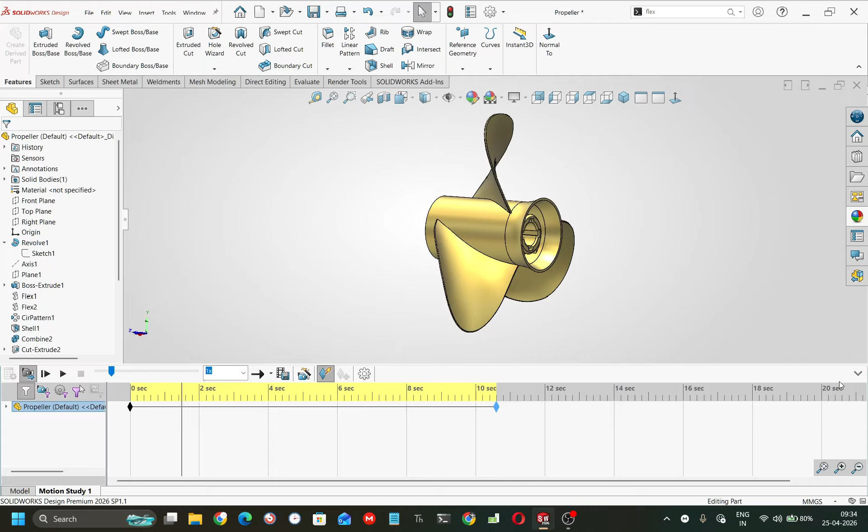In today's tutorial, we are going to create this clean and realistic propeller using SolidWorks step by step.

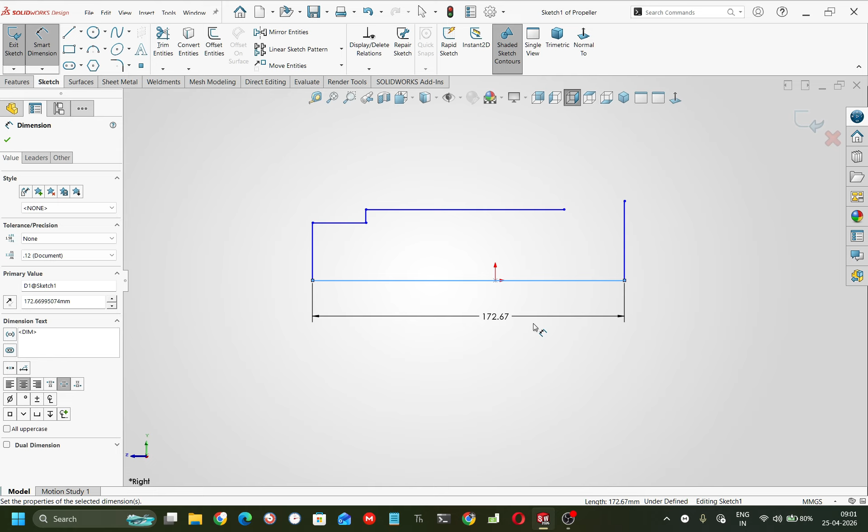Our first step will be creating a hub. Select right plane and sketch. As you can see on my screen, this will be our base hub creation. The horizontal length will be 150 mm, vertical length is 38, and this line vertical will be 2 mm, and this horizontal length will be 8 mm, and again horizontal line will be 115 mm, and this vertical line.

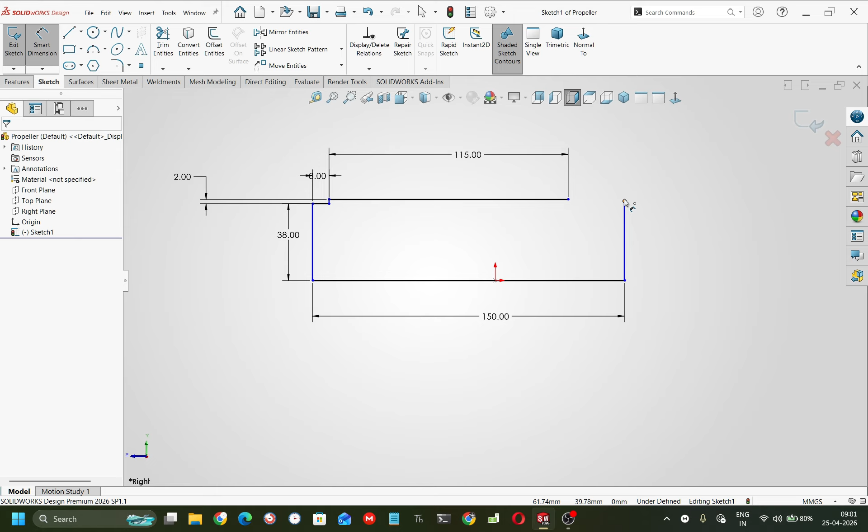Extend this vertical line, create an arc by using 3-point arc. The radius will be 60 mm, and this point and this point make it midpoint. Make it tangent also. So our sketch is fully defined.

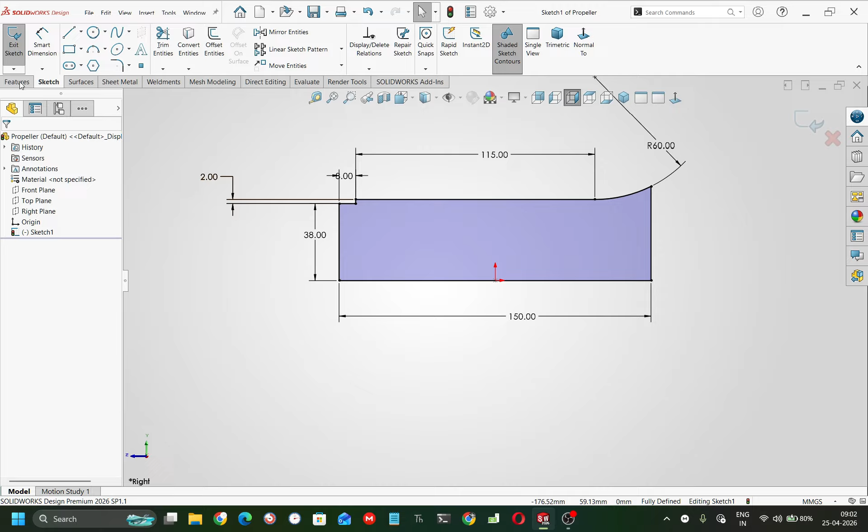Now I am going to use Revolve. Select this line and hit the green check. Our base hub has been created.

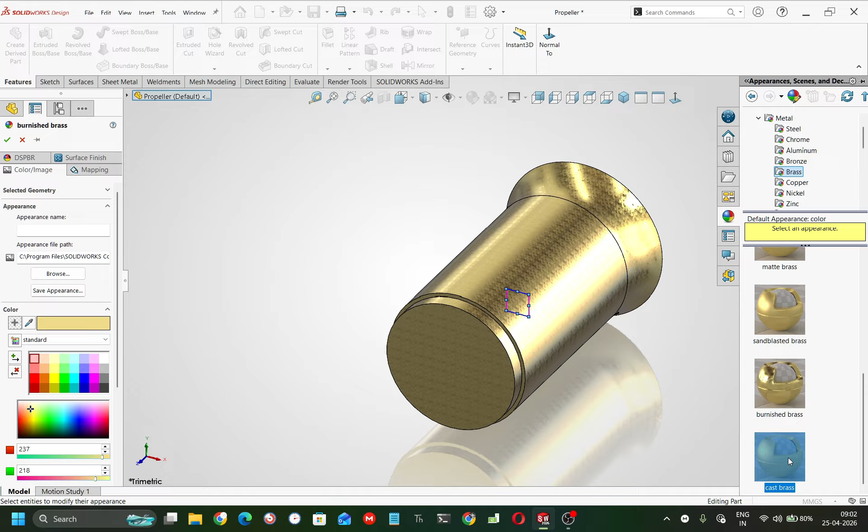Now I am going to change the appearances, selecting brass, and I am going to use burnished brass so it looks better.

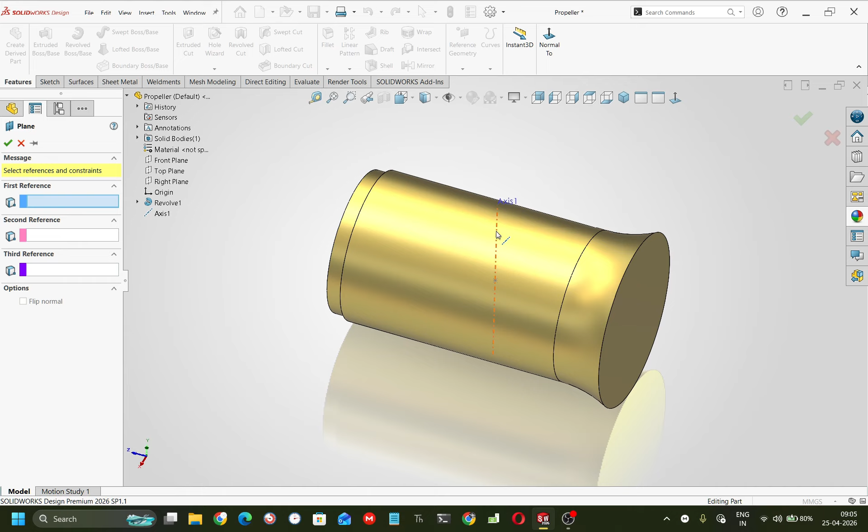Then I am going to create a plane. Select this axis and right plane. I am going to make a plane at an angle of 30 degrees. As you can see on my screen, I have created an angle.

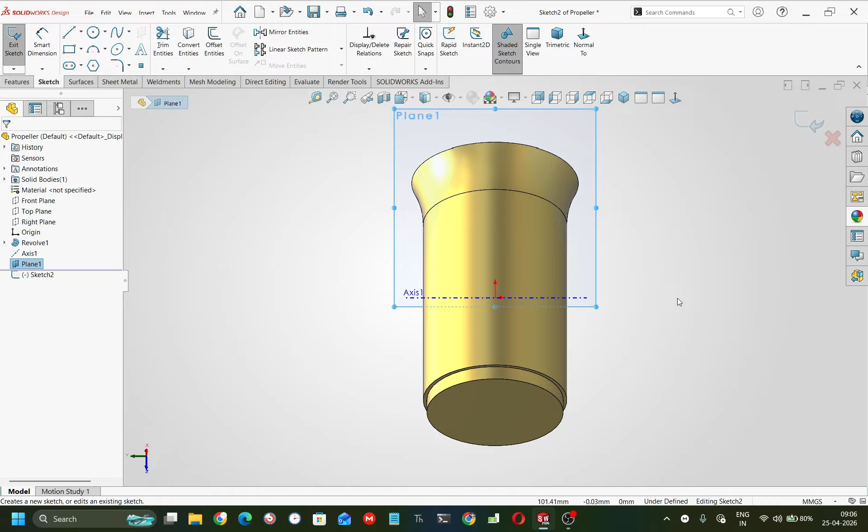Then select plane number 1 and sketch. I am going to select hidden line visible. Select a line, create a vertical line, and the distance from this point to that point is 65 mm. This origin point to the upper point will be 60 mm, and the distance between this vertical line and this origin will be 14 mm.

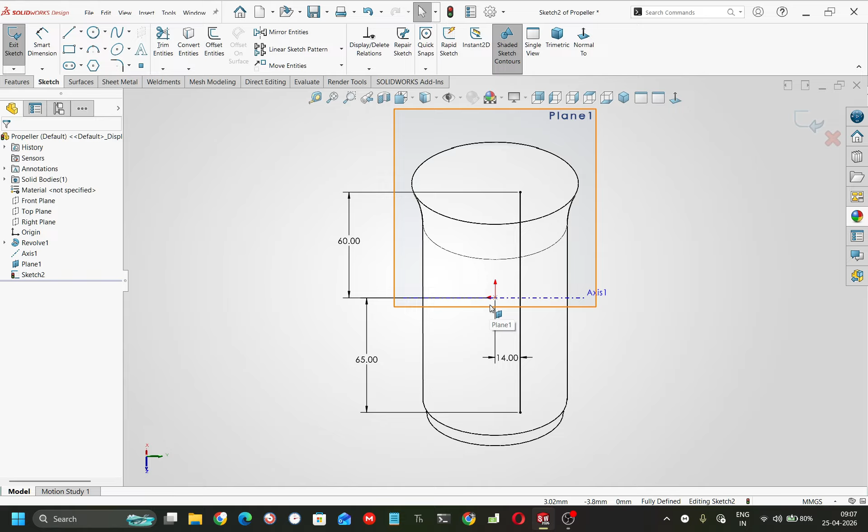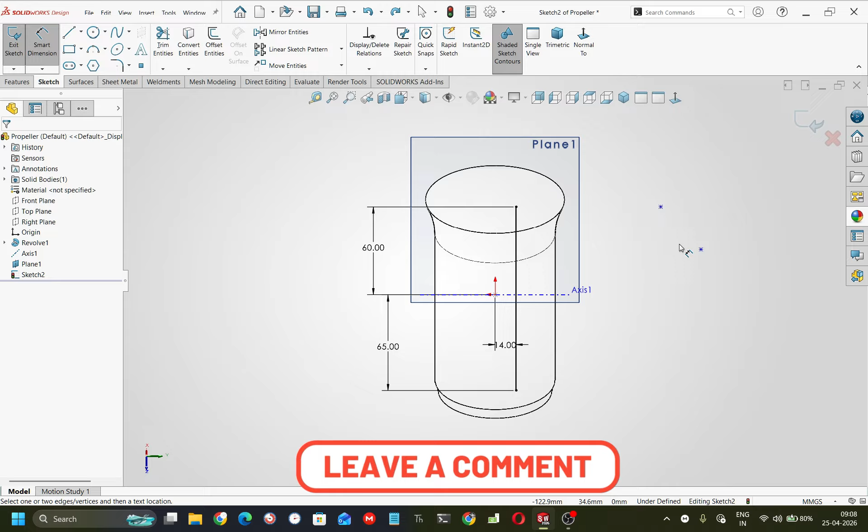Now I am going to create 2 points. Select this point, 1 point should be there and 1 point must be here. In this step I am going to define these 2 points. The horizontal distance will be 130 mm and the vertical distance will be 65, and this point to this point, origin point, vertical distance 34 and horizontal will be 150 mm.

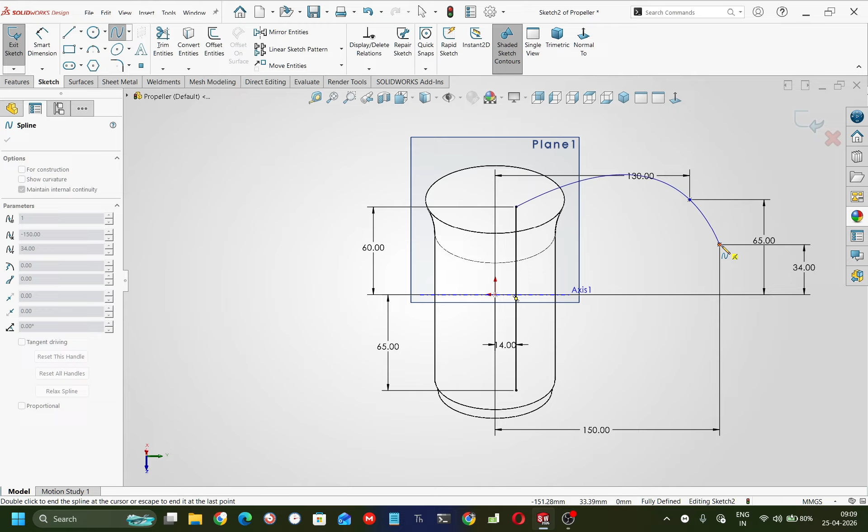So this is our path we have created. Now I am going to use spline. Select this point and this point and this point. This is a very important step, you need to see very carefully.

Now adjust this handle like this. Select this handle and make it vertical.

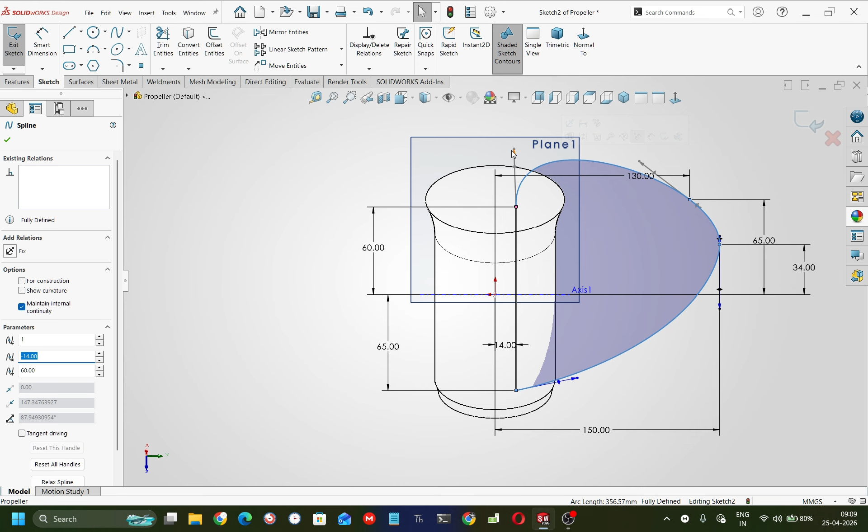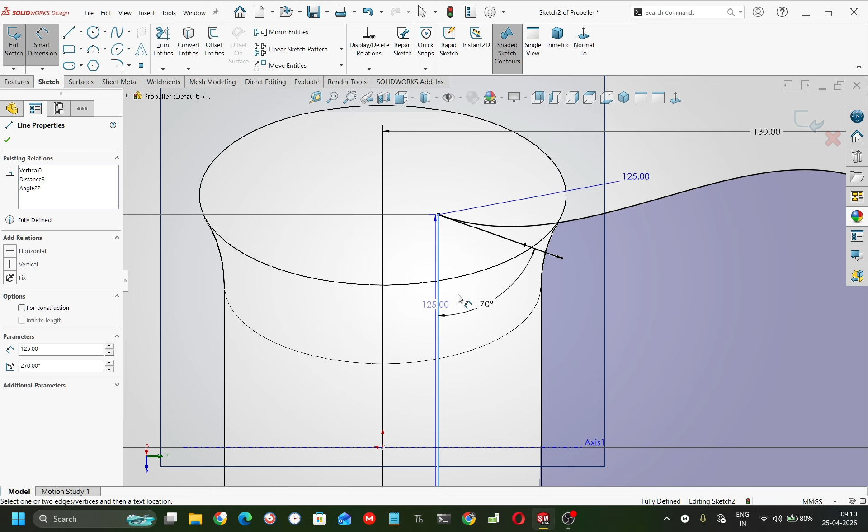To define the sketch fully, I am going to use smart dimensions. Select this handle, the first handle, the length, select this and this, the angle will be 70 degrees. As you can see on my screen, the handle length will be 125 mm. Our first handle has been fully defined.

Now I am going to select this handle, the second handle. Select this handle and this vertical line, and the angle is 75 degrees, and the handle length is 150 mm.

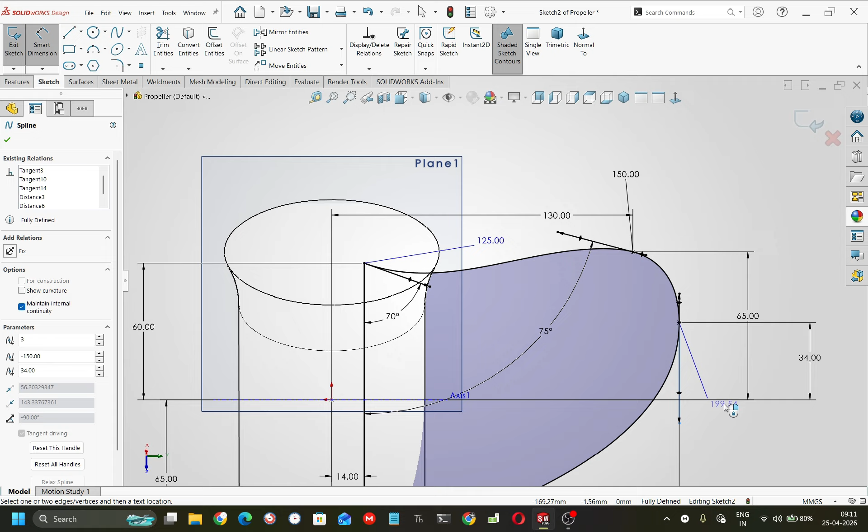The bottom handle length will be 210 mm, and this handle angle will be 79 degrees, and the handle length will be 240 mm.

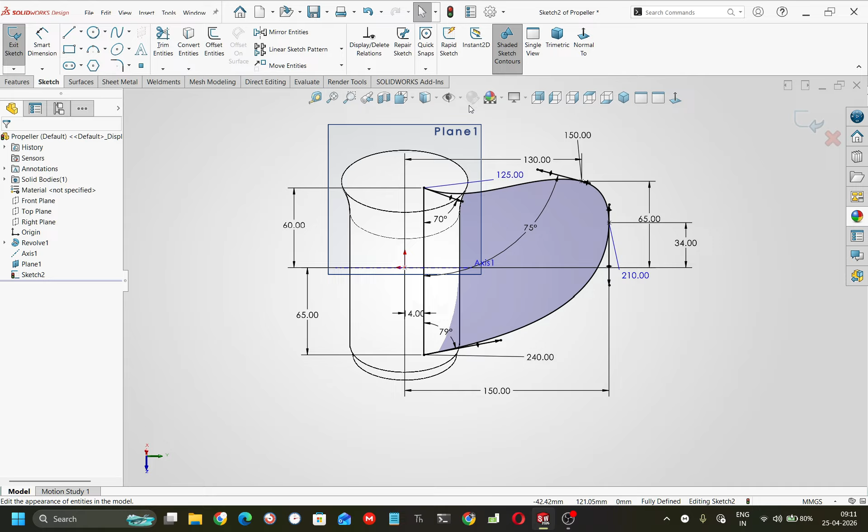Now pause the video. If you have any mistakes, you can correct them.

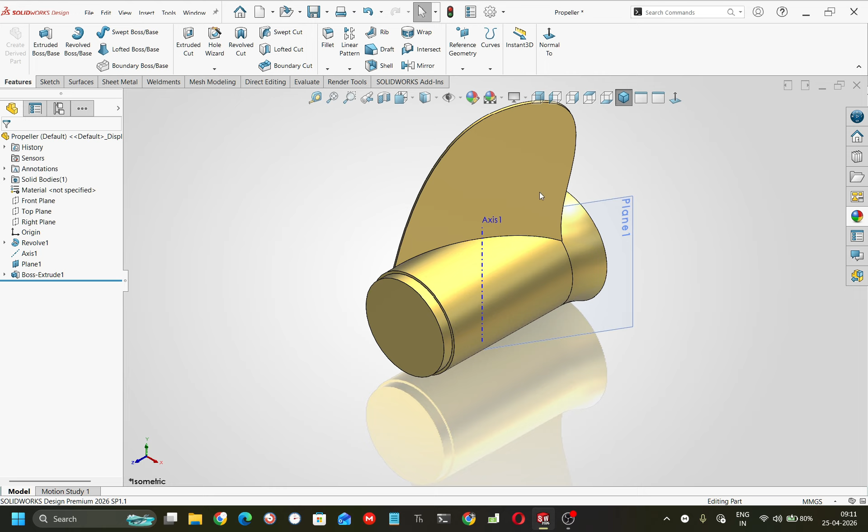Now remove the hidden line visible. Use boss extrude and select mid plane, and unmerge the result. Hide the plane and sketch. Select isometric view. Perfect.

We have almost 20% of the part completed.

This is the most important step to create this propeller's curve shape. I am going to use the flex feature.

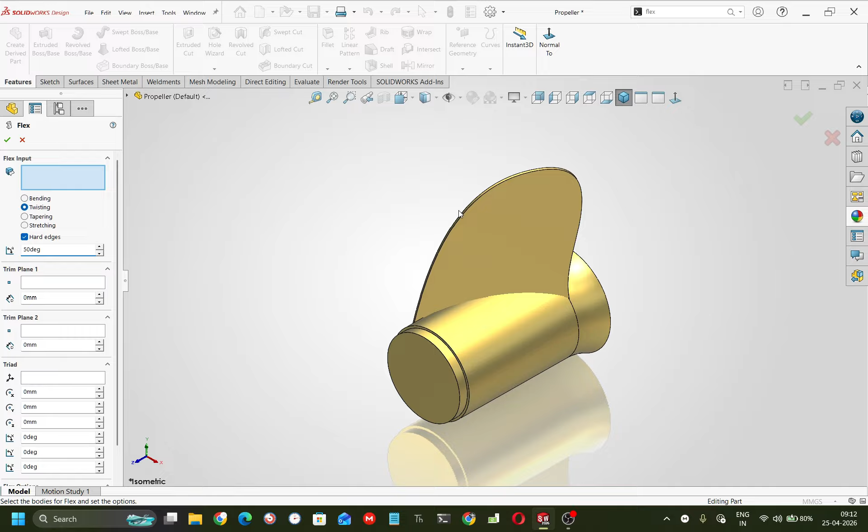Select first twist. The twist angle will be 50 degrees, and for flex input I am going to select this body. So this body must be in the X direction.

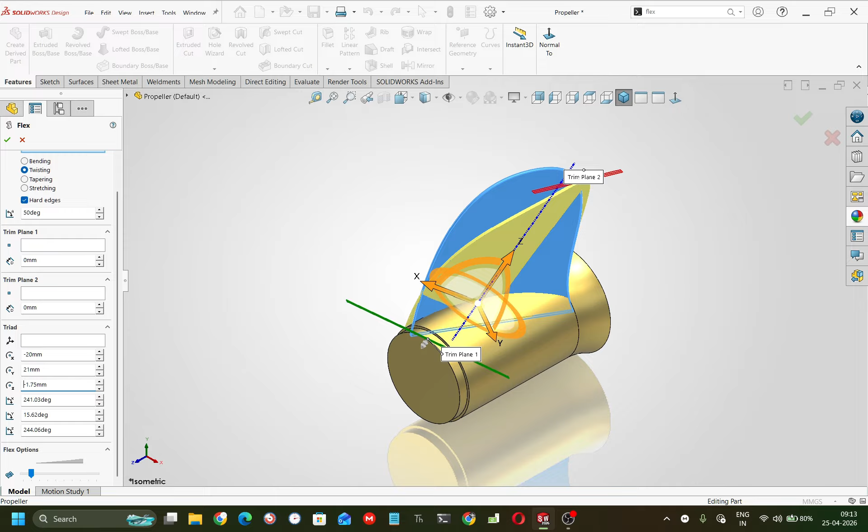As you can see on my screen, the X direction will be negative 20 mm. Y direction I want to twist 21 mm, and Z direction negative 1.75. The X direction angle will be 347 degrees, Y direction angle will be negative 25 degrees, and the Z direction I am going to select 0 degrees.

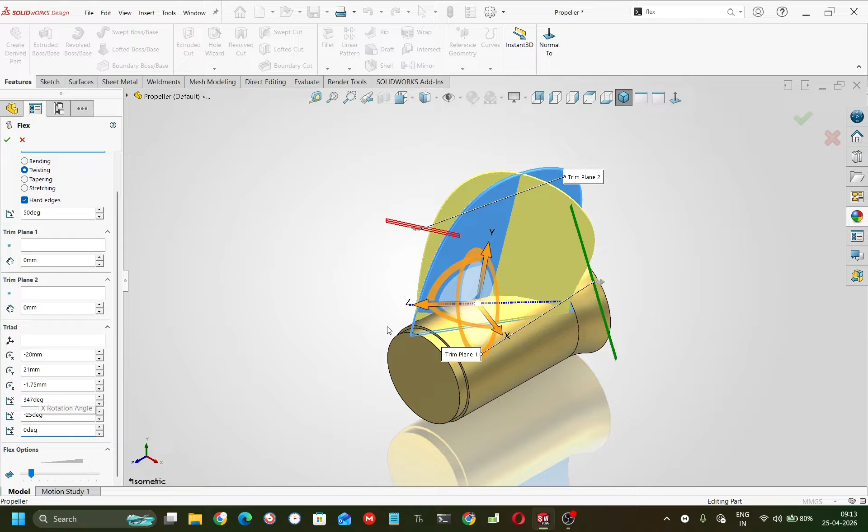So this is our part. As you can see how I twisted it, before and after. The yellow one is before and the blue one is after.

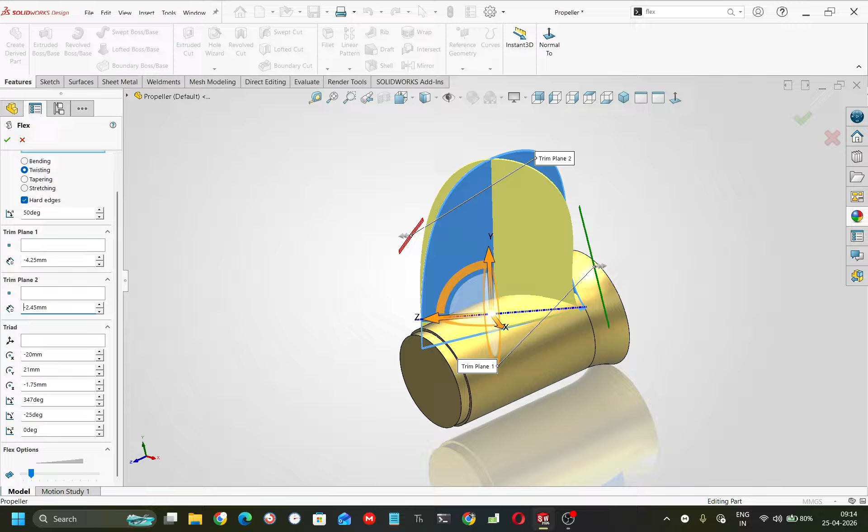The trim plane will be negative 4.25, and plane 2 must be negative 2.45. So these two planes must be in an offset position, so our geometry looks better with a curved shape.

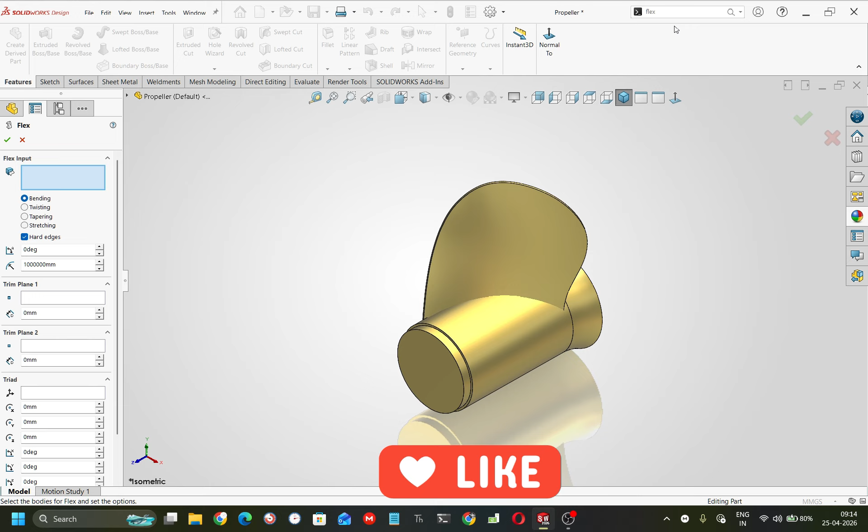Again I am going to select flex, now selecting bending. Select this part. The bending angle will be 45 degrees. It will bend.

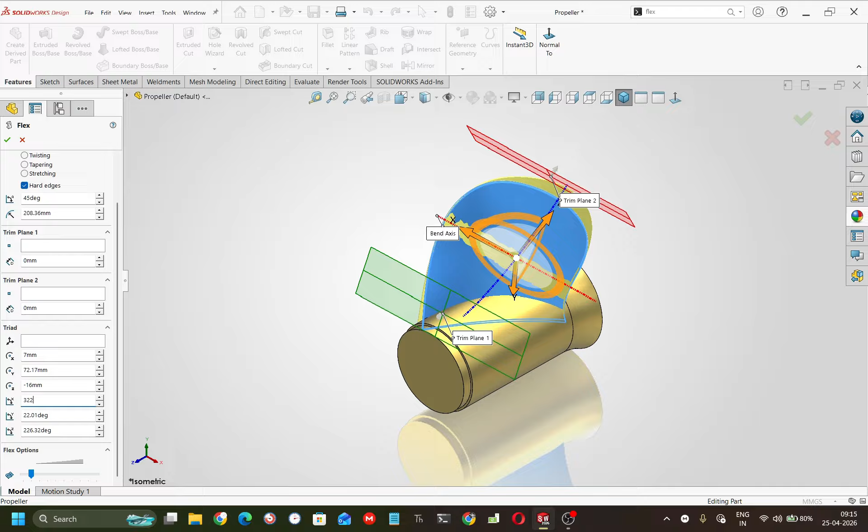In the x direction, I'm going to bend 7 mm. Y direction 72.17 mm, and the z direction will be negative 16 mm. The angle x direction will be 322 degrees, y direction angle will be 22.01 degrees, and the z direction angle will be 226.32 degrees.

Okay, and hit the green check.

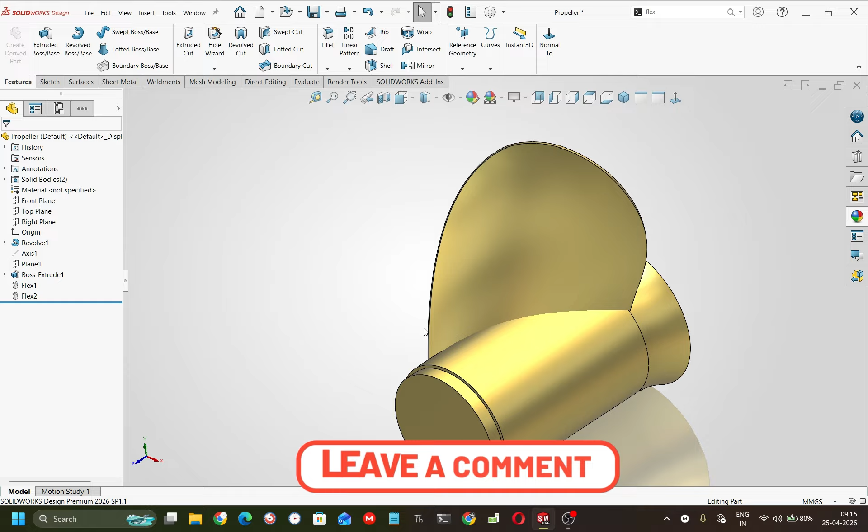The next step, I am going to use shell. This is our hub, it must be in a shell position. So the shell parameter, I am going to select 2.5 mm and hit the green check.

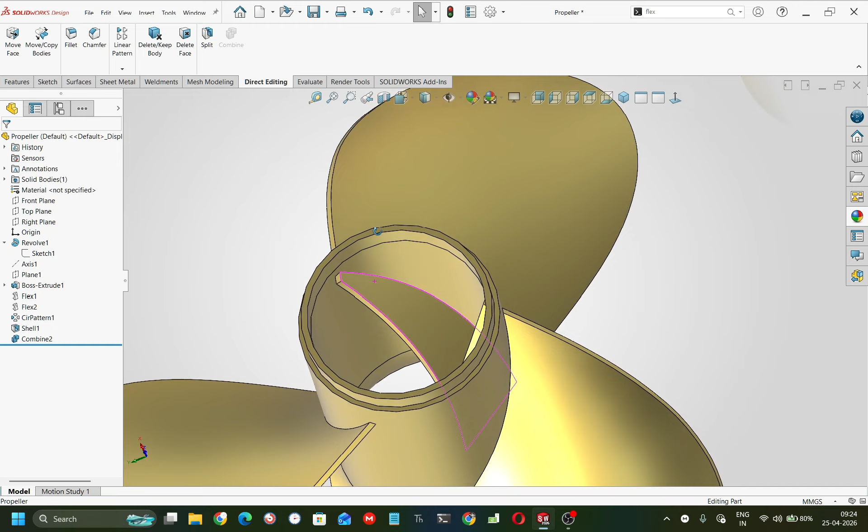I have skipped combine features, so you can combine this. Select this face and create a sketch. Select this center circle and convert it.

Choose extrude cut and through all. Make sure you combine this body.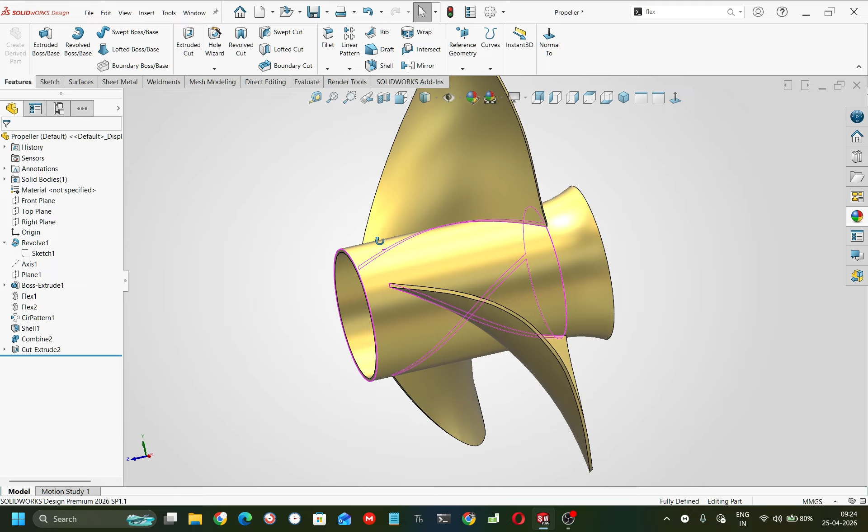Next step, select front plane, sketch, select circle, draw a circle at the origin position, and the circle diameter will be 50 mm. Okay, now choose extrude boss.

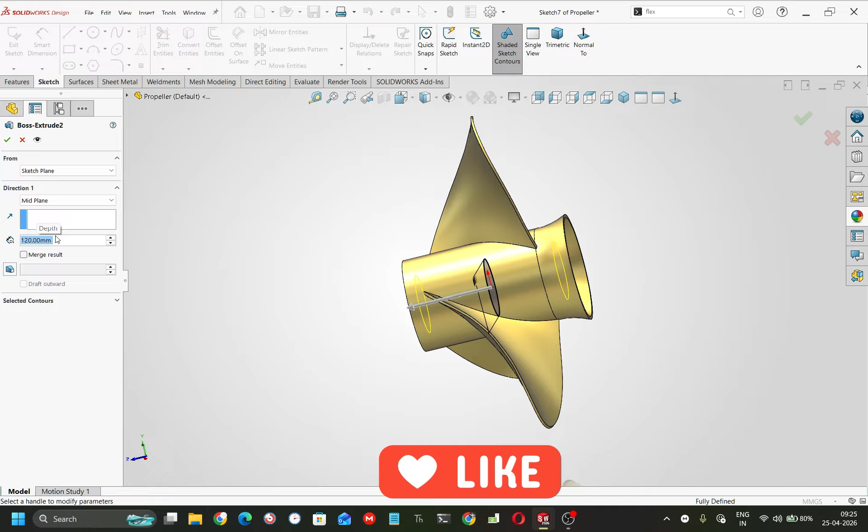Select mid plane, and the distance is 120 mm. Mid plane extrude boss 120 mm.

Go select isometric view, again select front plane, draw this geometry, select rectangle and create this.

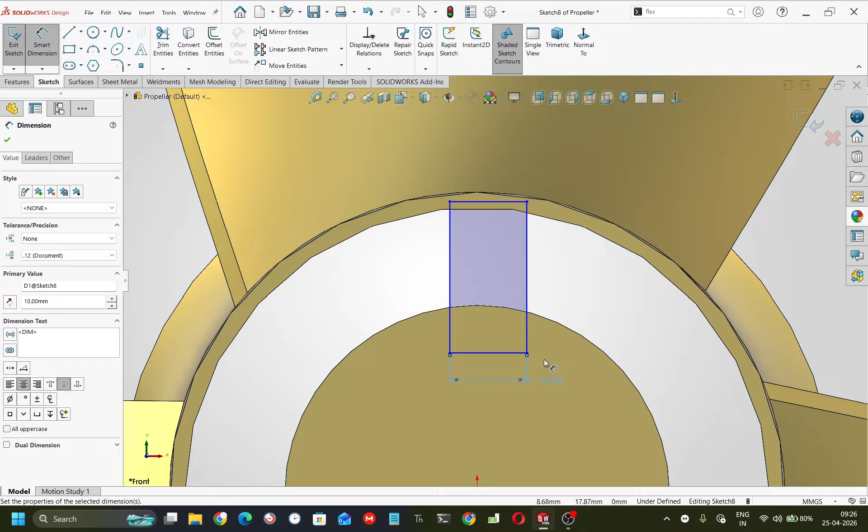The horizontal distance will be 10 mm, and the vertical distance will be 20 mm.

Select this point and this mid point, make it vertical, and the total distance will be 18 mm. Perfect.

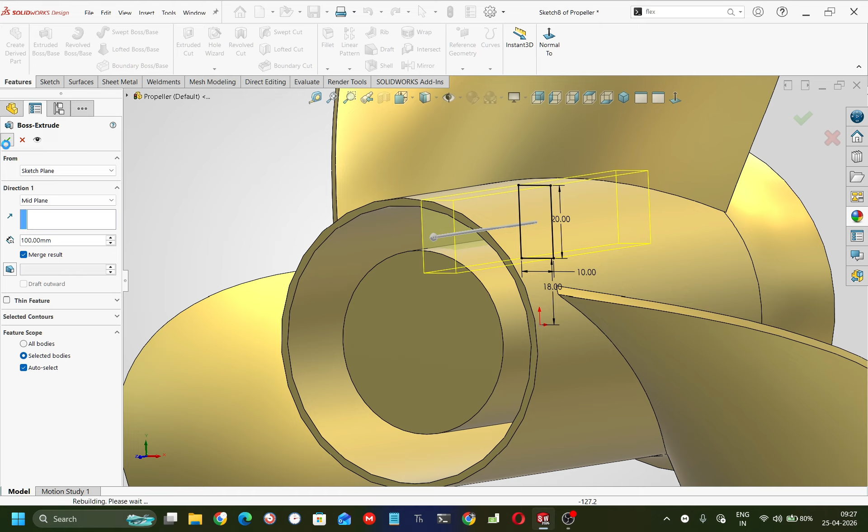Go to the extrude boss, select mid and 120 mm, or 100 mm. I'm going to use 100 mm. Okay.

I'm going to use circular pattern. The direction will be this circle face, and the features I want, and the total number of pattern will be 3. Circular pattern will be 3.

Select this face. I'm going to use a circle and the circle diameter is 30. Select center rectangle, draw vertical rectangle as well as horizontal rectangle.

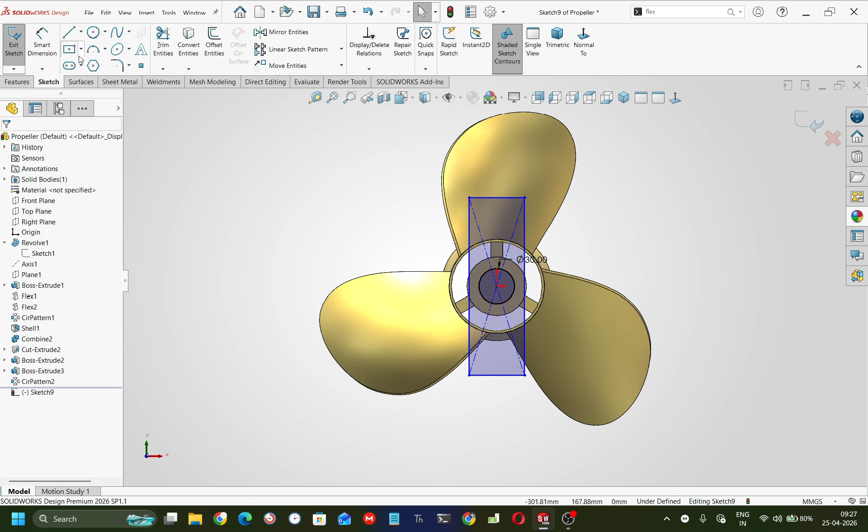This rectangle horizontal length is 6 mm, this also 6 mm, and this vertical length will be 36, and make it equal. Select this vertical and this one.

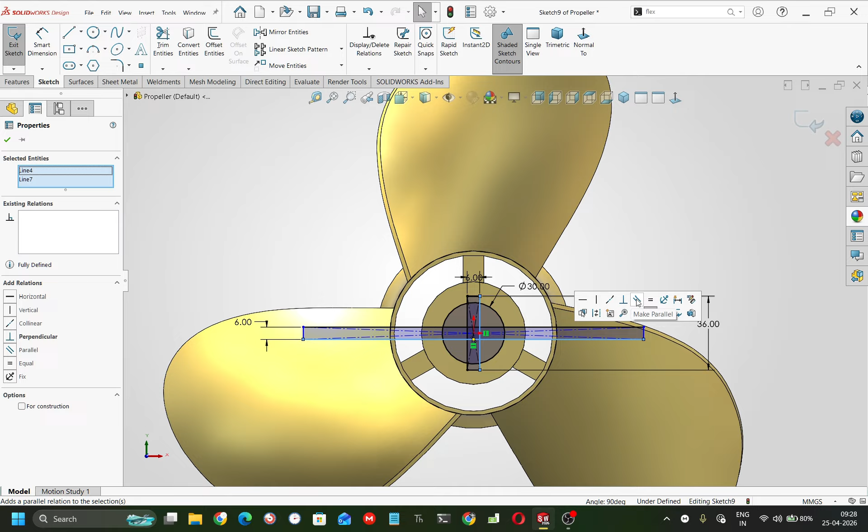Our sketch is fully defined. Now I am going to use the extrude cut feature.

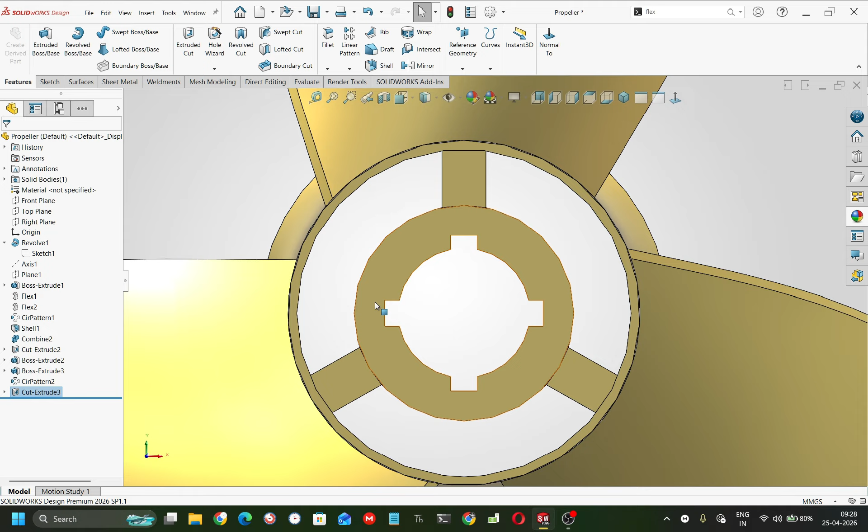Select through all and selected contours. Select this circle and this horizontal and vertical rectangular shape and hit the green check. Our part will be cut by this shape.

In the next step, I am going to use fillet. Select this, and the fillet will be 0.5 mm.

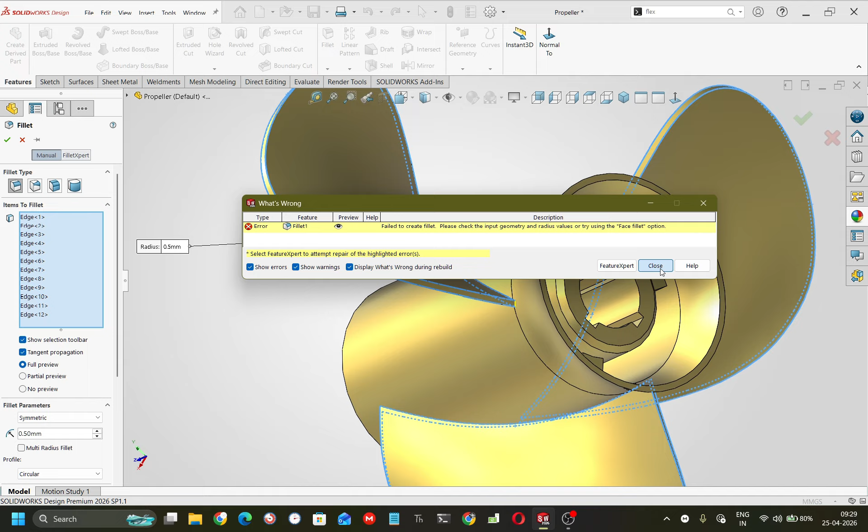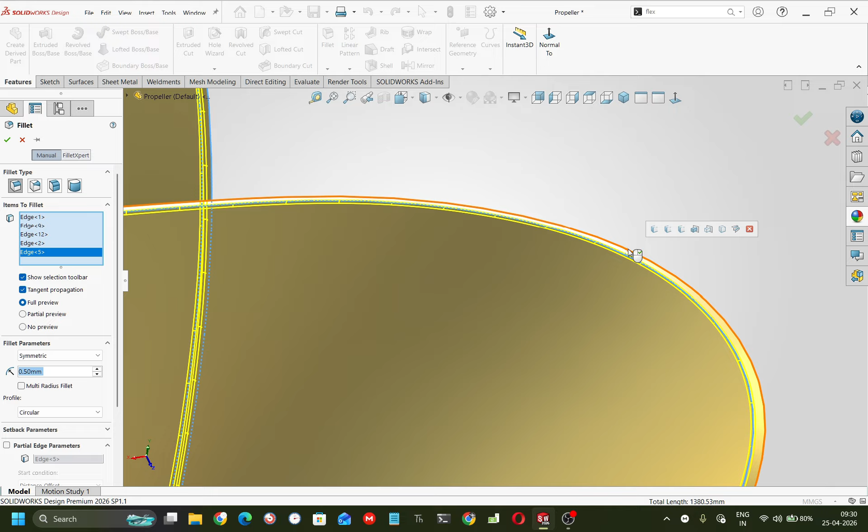Clear the selection. Manually I have to select all these edges, as you can see on my screen: this edge, that edge, this edge and that edge, and hit the green check.

Again, the second fillet now will be 3 mm.

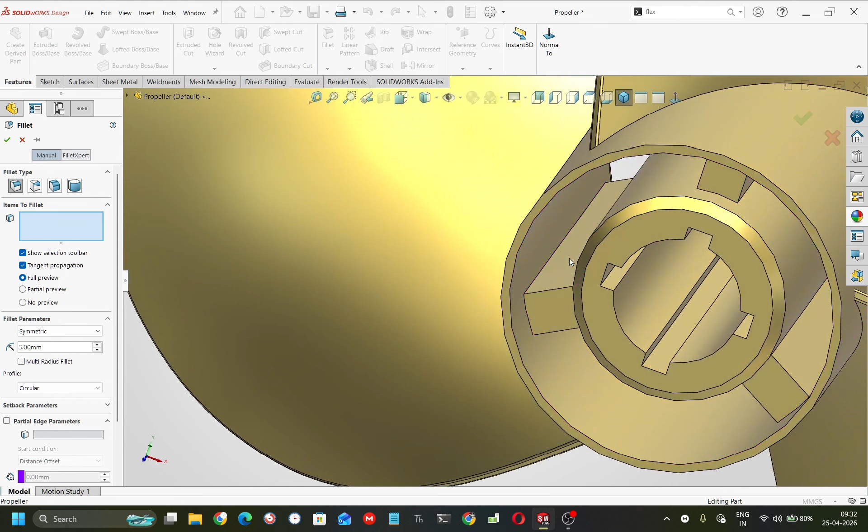Item to fillet, select this edge and select first or second. Third, I think I am going to select second one. Yes, second one. Select this edge. SolidWorks will automatically collect all the edges.

There are 12 edges. Instead of selecting manually, you can use these features as well. Try it if you like this stuff.

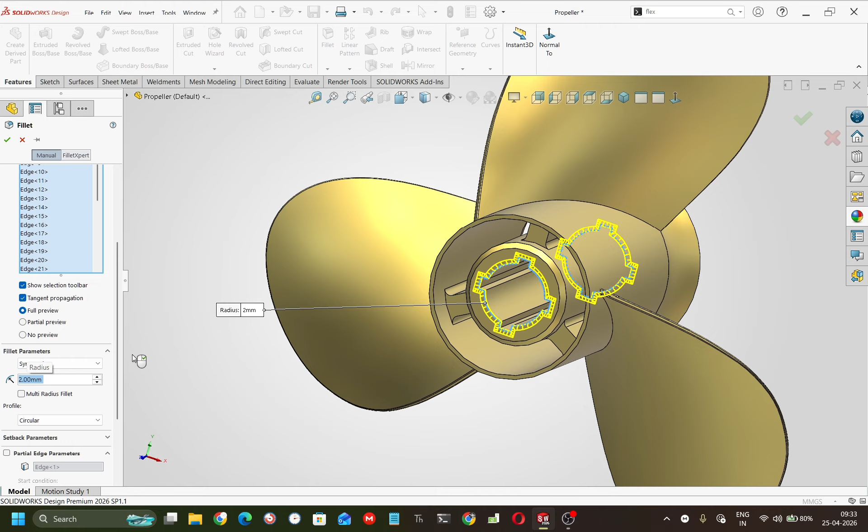Now again select fillet. Select 1, 2, 3, 4, 5, fifth number. SolidWorks will automatically collect 32 edges, and the fillet parameter radius will be 2 mm.

Okay, our part has been created by using SolidWorks 2026.